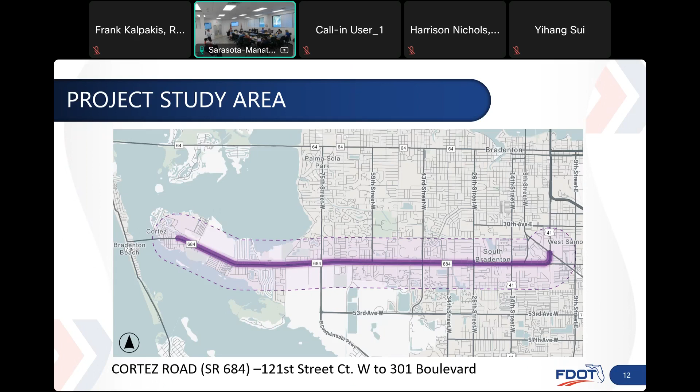Based on what we heard and what we've seen out there, we developed some themes to guide our strategy. Those are the vision themes. The main one is a safe and accessible corridor for all modes—bikes, pedestrians, freight, transit—so looking at alternatives for everybody.

We also highlighted connectivity, the grid network, so more ways to get around besides just having one straight shot through Cortez Road. That would help alleviate some of the traffic and help people who are traversing the corridor.

Economic vitality—we want to make sure that businesses along the corridor are thriving and the new businesses that are coming also have an opportunity.

We also want to make sure we maintain the corridor characteristics, but also enhance the sense of place, so people who are living there, who are from the community, can feel good about the place where they are.

Here's some background and part of our technical analysis. Those are the intersections that are congested right now, and they're operating under the standard level of service assigned to them. It doesn't mean they're failing, it just means they are congested, and you can see 75th and the eastern part of the corridor are where the intersections are most congested. Those are existing conditions.

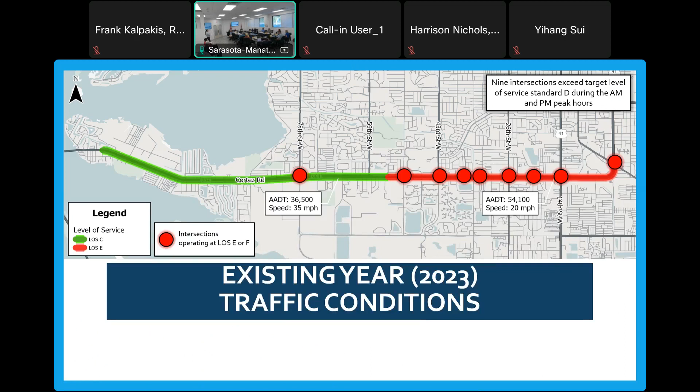Based on the 2050 projections, the conditions are to stay the same where they were, and also going to deteriorate getting all the way to 75th. As you get closer to the bridge, you see the red dots in there. So it's not going to get any prettier or any better as we get all the people moving into the county.

Population growth—I think just for Manatee County, in 2050, it's about 215,000 people, and that's a little larger than the city of Fort Lauderdale. So it's a lot of people moving into Manatee County.

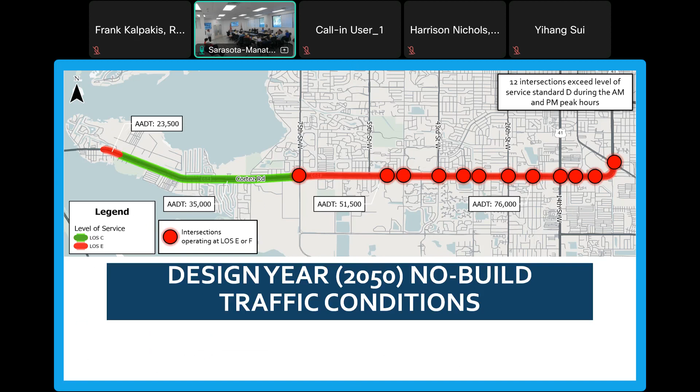Some of the things that we observe on the corridor is the high level of stress for pedestrians and cyclists, and that is due to the high speed of vehicles, the amount of traffic, and the lack of facilities and infrastructure for cyclists and pedestrians. So we know that all of that is hindering the ability of people who want to bike and walk on the corridor, and it's something we want to address.

Some of the key analytical findings are more of our technical data that we collected. We already know there's going to be a lot more people living in Manatee County, and that's going to increase trips for all modes—pedestrians, bicycles, especially vehicles—so we want to make sure we find alternatives that will address that.

We've seen a high number of crashes. It was also mentioned that Cortez, that segment, is on our top 10 high crash list, so especially on that eastern segment, that's where we see the most crashes.

We also want to address the needs of the disadvantaged communities that are around the corridor who might need different ways to get around. They might not own a car, they might not have the income to purchase a car, or maybe they chose not to have a car, or they have different abilities to get around.

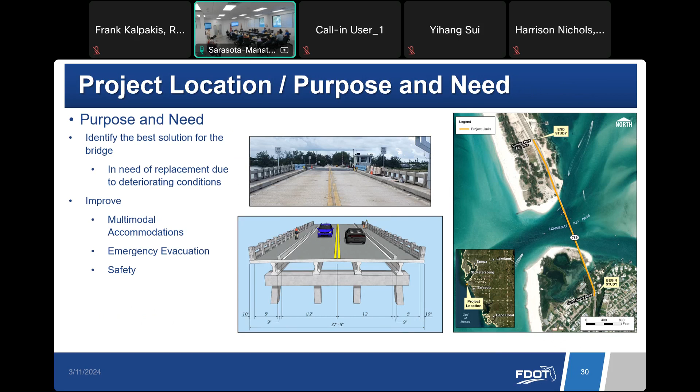This particular bridge was built at the same time as Cortez and Anna Maria, and it's past its original service life, so it's having to go through increasingly expensive and disruptive repair projects to keep it open. It also has substandard elements — there's no bike lane, just a sidewalk with a little curb on one side. So we're looking at replacing the bridge and adding multimodal accommodations. Workshop tomorrow online, Thursday in person, and I'll show more details on that.

In 2021, we had our kickoff meeting for this project where we sent out surveys. We collected a lot of information on boat traffic, and we also surveyed all the marinas on Sarasota Bay. Through Coast Guard coordination, we determined we would need a 78-foot bridge if we go with a fixed bridge at this location.

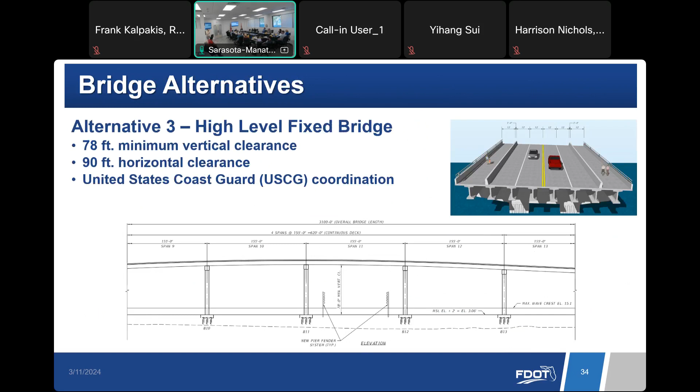So for the alternatives, we have two movable bridge options. The first is the lowest possible through Coast Guard requirements, a 23-foot clearance, slightly higher than the existing bridge. The second is 36 feet, which reduces the number of openings by about 35%. The final option is a 78-foot fixed bridge.

With the movable bridges, the mechanical components add a lot to the project cost, over 30 million. So the fixed bridge is coming in around 80 million, while the movable bridges are over 110 million.

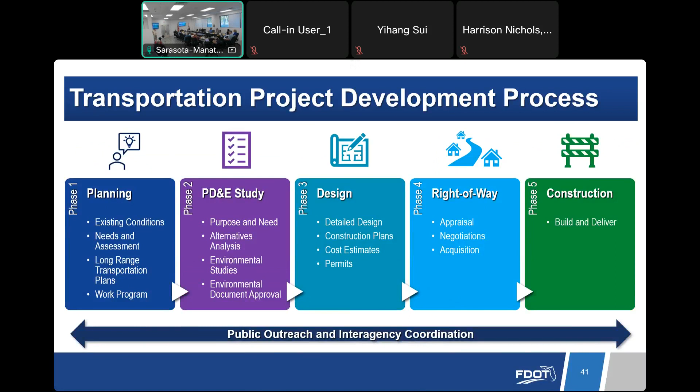For the Ringling bridge in Sarasota, in addition to having the PD&E study ongoing, we went ahead and started design, so we're at our 15% submittal. That project also does not have a right-of-way phase, and it has construction funds in 2028. The location is just east of St. Armands Circle.

We are going to a public hearing next week. For this one, we already had our workshop, where we showed the single and twin bridge alternatives, and there was support for the single bridge alternative, so that's what's going forward. We're making our official announcement of this decision at the hearing next week on Thursday.

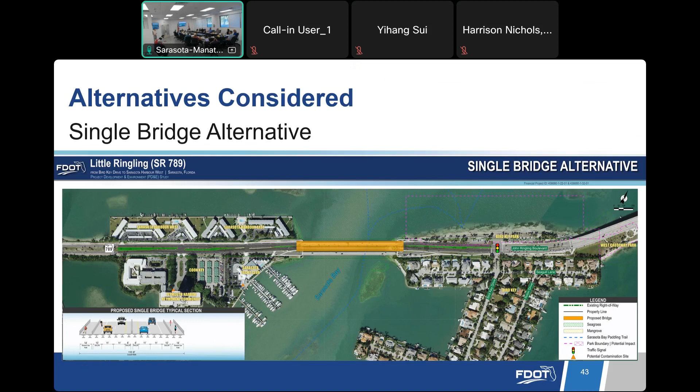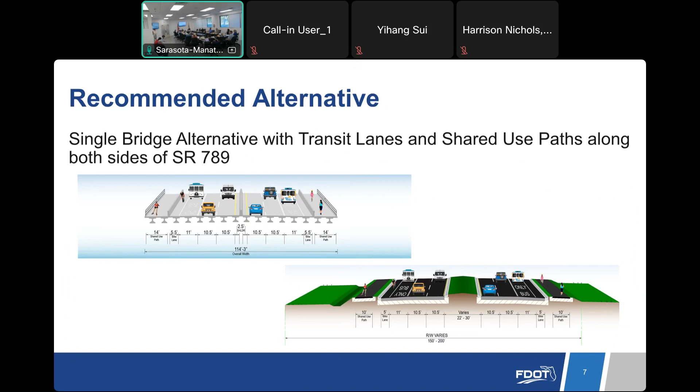This bridge currently includes 4 travel lanes, but we're adding transit-only lanes, bike lanes, and shared-use paths to both sides. Bike lanes and transit lanes will also be added to the approach roadways. There's another project east of Bird Key, a resurfacing project that's also adding transit lanes, so that should be continuous from the roundabout to the end of my project, and some future project will carry that on to St. Armand's.

My project, PD&E's ongoing, design's ongoing, construction is funded, and the 54 million here is our latest construction estimate. If you look at the work program, you'll see something like 61 million, because that number is new and the work program cycle hasn't synced yet, but our cost estimate did go down from last time. The schedule is going to the hearing next week, and we'll wrap up our documentation and submit for federal approval this summer, hopefully getting approval by the fall.

Overall schedule, design still has plenty of work to do, including utility relocations. Construction is scheduled to start in fiscal year 28.

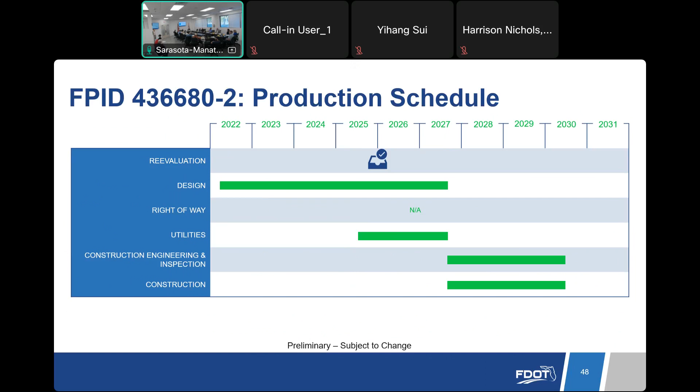For the hearing, we have our open house starting at 5 o'clock and formal presentation at 6. The virtual meeting also starts at 6, which is a simulcast of the formal portion of the hearing. But if you are online, you can still speak to the whole group as if you were at the meeting. So that's it for that project.

So, any question? Thank you. Okay.

6B. Yep, 6B. Draft Transportation Regional Incentive Program, TRIP.

This is a program type that's within our project priorities. A little bit about TRIP: it's the Transportation Regional Incentive Program, a state-funded program that requires projects to support the regional transportation system, typically in our area that's I-75 and 275. Anything that supports that creates more of a regional impact. Our transportation system is eligible for this program, and it has to be identified in the LRTP as well.

These funds require up to a 50% match in order to be utilized, so there has to be significant skin in the game by the local government to draw down on these funds. We also work with our two neighbors to the north and one to the south, Polk County and Charlotte County, to develop joint TRIP lists in order to consolidate our requests within the district. There's only about $7 or $8 million a year dedicated to this fund.

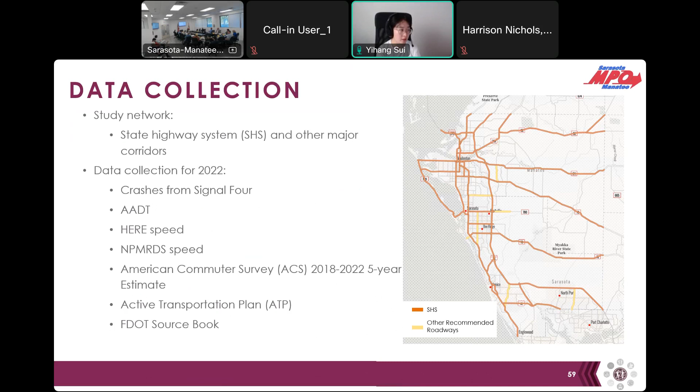So we further expanded from the state highway system and included some other corridors for the CMP. Some data we collected include the crash data from Signal 4, the AADT data, travel speed, NPMRDS, truck travel speed, American Commuter Survey 2018 to 2022 5-year estimate, and also data from the Active Transportation Plan, ATP, for the multimodal component of the CMP. The FDOT sourcebook was also used for the data analysis and collection.

Next slide, please. So here on the right side shows the map of the MPO with goal number 2, which shows the vehicle hours of delay during peak hour. We also have vehicle hours of delay at the daily level, but here I demonstrate the peak hour for your reference. Goal number 2 is aimed at providing high quality mobility to people and freight.

So one of the things we want to focus on for the CMP is to solve the congestion issue, which the vehicle hours of delay could tell us more background about the actual existing condition. So I-75, not too shocking, the corridor has a very high hours of delay, and also University Parkway and State Road 70 show some sections with relatively higher or medium levels of delay, from the legend shown on the left side.